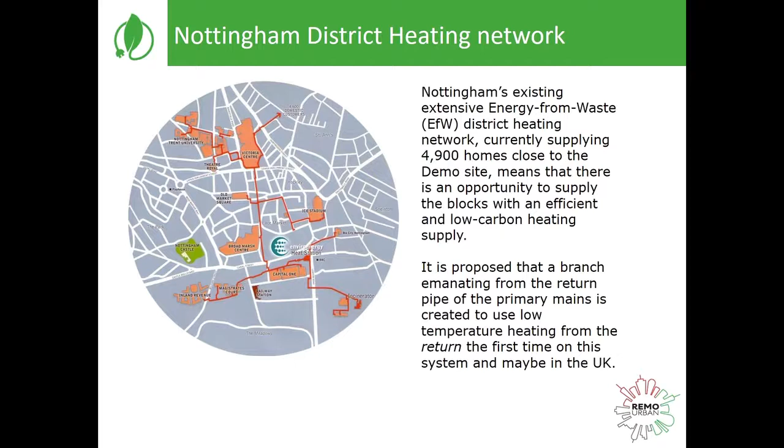What are the advantages of low temperature district heating? First of all, by reducing the temperature level, we actually provide an opportunity to incorporate sustainable heat, so the heat can be diversified by industrial excess heat, geothermal heat, etc. Also, by reducing the temperature of the supply, we are reducing heat loss by 75% due to transmission.

Since we're using lower temperature, we can also diversify in terms of pipe material, using not only metal pipes but plastic pipes. And finally, due to the reduced temperature, the danger of damage from boiling if there is some damage in the pipework can also be reduced.

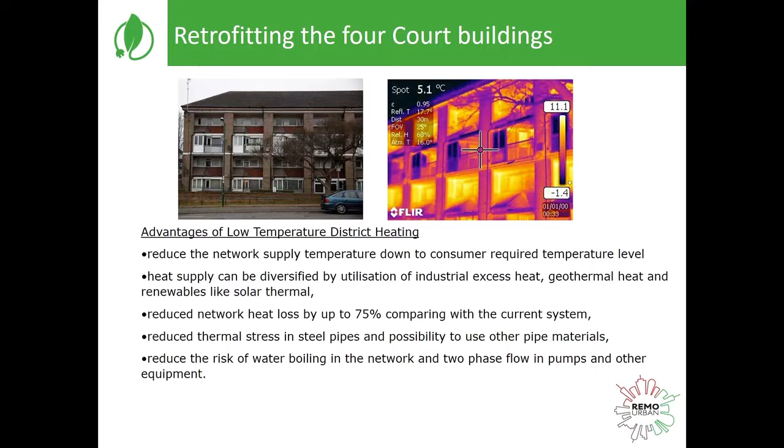The next slide illustrates how the actual retrofitting is being done. My colleague David Tetlow will talk more about the implementation, but essentially what we did was try to improve the building fabric by putting insulation on the walls, and also you can see the actual pipes on the roof of the connecting staircases.

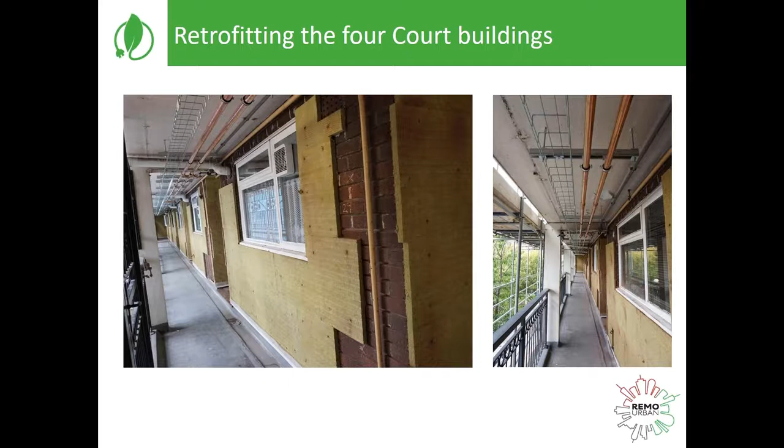Since the system has been running from March, April this year, we have used a SCADA system to collect data, and by writing programs based on Python programming software, we can collect and visualize in a much more advanced way the actual consumption and how the heat is being consumed in various places.

Based on the supply data, we are trying to develop some advanced models. The first model, developed using the Python programming language, is to do a hydraulic balance of the network. For Byron Court, which is displayed here, there are 31 flats, and for each flat we have developed a space heating system, shown at the top of the slide, to work out how best we can supply the network so that we minimize the energy used.

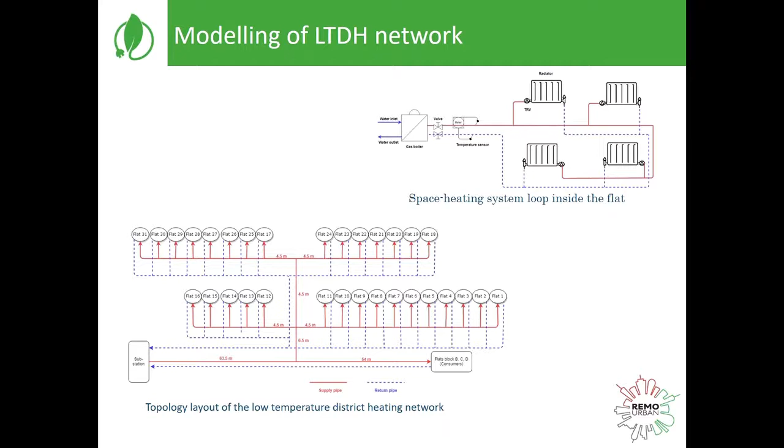In the next slide, you see we have programmed 4 different scenarios. The first and third scenario provide constant temperature supply at 60 degrees, with the first using constant flow rate while the third uses variable flow rate. Scenarios 2 and 4 supply different water temperatures with constant and variable flow rate respectively.

Using the Python model, we have worked out that scenario 3 actually provides the lowest energy consumption in kilowatt hours, and is probably the best scenario to run the network.

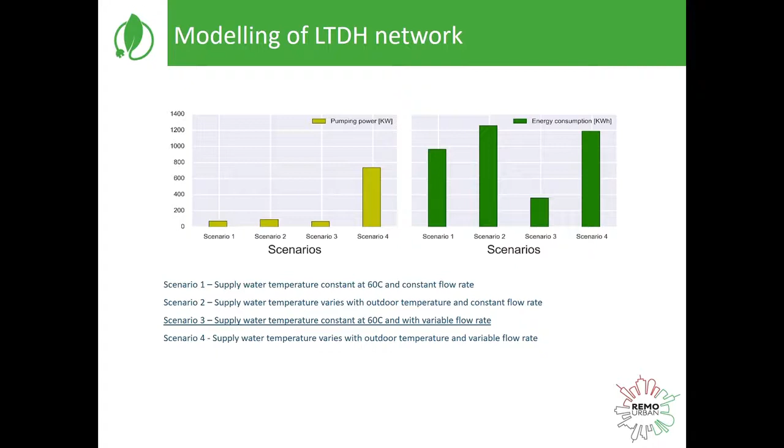Based also on the SCADA data that we collect, we're trying to develop an advanced simulation model. This model is particularly developed based on the Modelica Dymola platform, which we're aiming to use to model and simulate complex energy systems.

Using the Modelica platform, we are nearly able to develop the so-called digital twin, which can actually produce real output data, based on using Energy Plus, another program, to generate the heating needs.

In these plots, you can see that the individual courts are developed into individual subsystems, and on this subsystem we have another layer of subsystem to develop the modeling of the individual flats. The present model is still in development, but it has produced some initial results which are very encouraging, and we are planning to develop it further.

This model is based on the initial development, which can be improved later.

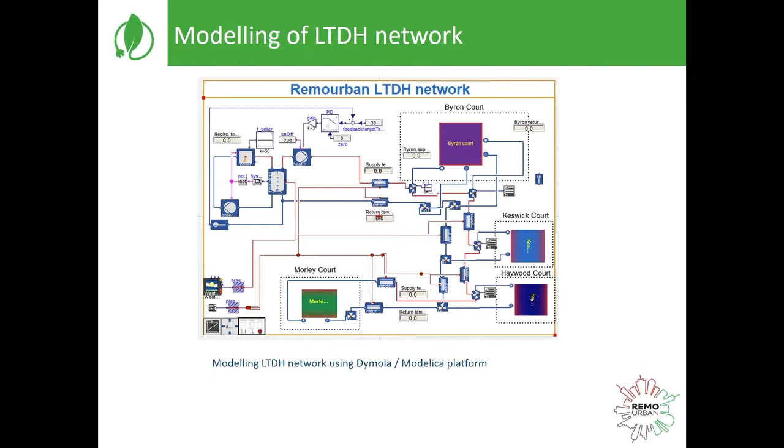Apart from this, we are also developing the so-called intelligent control system using Siemens MindSphere Internet of Things. The important element of Internet of Things is that we are creating domain knowledge, which includes historical data concerning energy used by individual consumers, weather data, etc. And we can analyze how the system operates at all levels for a complete life cycle, for example.

This system is also under development, and what we are aiming to achieve is to optimize energy use and storage, allow provision of alerts and alarms for assisted living, so the system could be implementing a real application, controlling the operation of the low temperature district heating. Also, the system permits energy consumption feedback for all the tenants, with some advice on how they can run their own heating system in the flat in the best way.

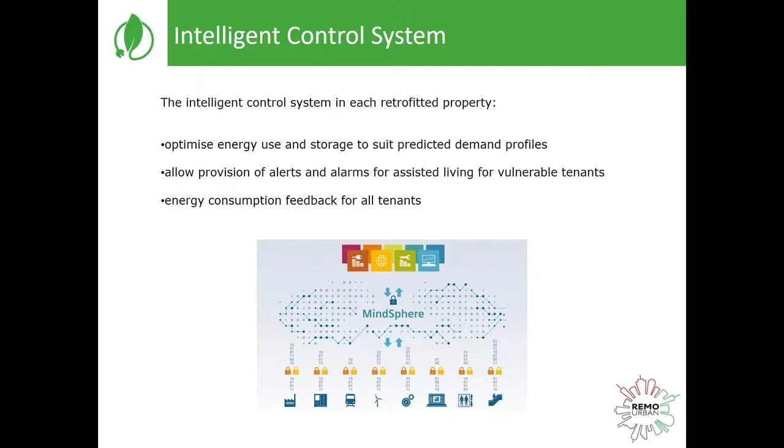In summary, an innovative low temperature district heating network is developed in Nottingham, supported by the Remourban project, part of the smart city community. Four maisonette blocks of 94 flats have been selected, where gas boilers are being replaced with heat exchangers, and they've been joined to the local district heating in the form of low temperature district heating.

Advanced modeling techniques are developed aiming to create a digital twin for the low temperature district network, and these models are developed using real data from the network. These models allow us to rapidly look into the influence of the main network parameters and introduce modifications when needed to optimize overall performance. The main aims are to reduce peak loads and reduce the return temperature of the network, making it more optimal and more efficient.

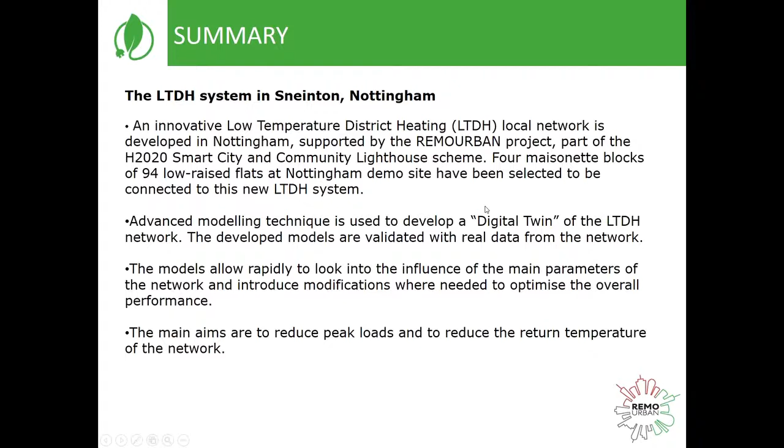Wait a minute. So, okay, are we ready? Okay, I'm going to assume that is a start. So, hello everybody, I'm obviously taking part for Arnout today. He's been taken into another meeting which occurred last minute due to another project we have on. So I get the opportunity of presenting this to you today. But me and Arnout work very closely, so a number of the parts of the presentation we're to discuss I'm very familiar with. So, this one. Okay, so it's that one there. Yeah? Okay, so...

Short introductory slide here, which outlines the reasons why we are originally pursuing the project, which essentially comes down to three things. One was to meet our climate change targets by 2050 for all of our homes within Nottingham. Now, Nottingham has a substantial portfolio of council-owned properties with a range of tenants, over 26,000 in total, and its aim is to become carbon neutral by 2028. So a significant ambition for the city itself. Essentially, we're looking to reach our 2050 targets by 2028, so this technology is an enabler in that process for us.

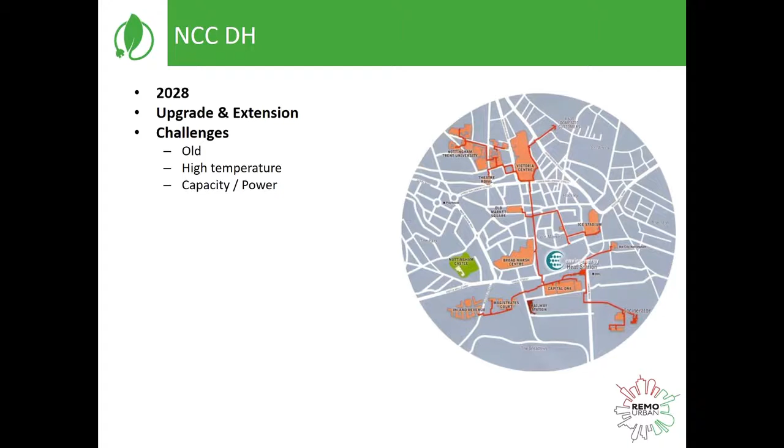So one of the potential opportunities we have as a city, which Arnout referred to in reaching our 2028 target, was the extension of our existing heat network. Now, this is nearly 50 years old, in fact more than 50 years old this year, I believe. And with that, it's high temperature. What we do is burn our waste in the city, and this provides heat to all of the properties, as Arnout mentioned previously. It has significant capacity and power, but because it feeds a certain number of house types, a large proportion of which are inefficient, improving the efficiency of those houses enabled us to extend the existing network, because more energy could be spread to more properties from that network. So that enabled us to expand where we could go with the existing network itself.

This is a typical building which we focused on in this project, a low-rise set of four buildings with 94 flats in total.

Now, these were in Sneinton, and we call these the courts. The number of units in each property varies, some have more than 30, whereas others have less than 30.

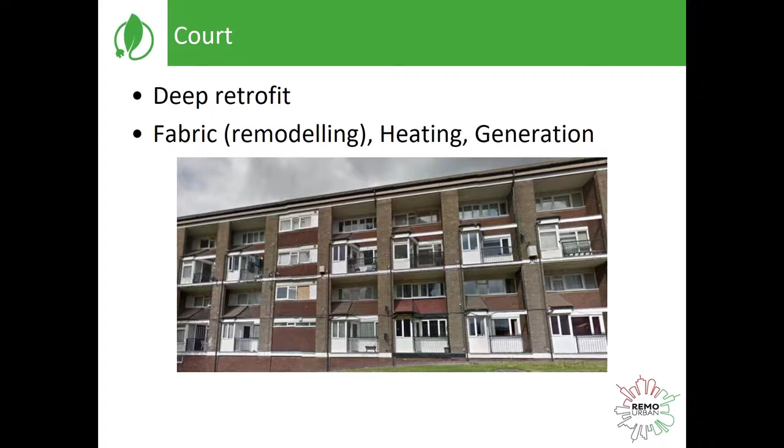The first thing we aimed to do was improve the fabric, mainly so the heat could go further, as mentioned in the previous slide. So we improved the fabric, improved the air tightness, and made them more comfortable for the tenants inside. This would reduce heating loads in general, but we were also looking to change how people utilize heat by incorporating the low temperature district heat network, which means a change in how heat is distributed in terms of temperature, but also how people utilize energy for cooking. Many existing tenants use gas cooking, so this project enabled us to look at other options like electrical cooking too. So it offered us a range of energy reduction opportunities.

This is the building today, showing what we've done to improve the fabric. Essentially we wrapped it in insulation, improved the air tightness, and made architectural changes to how the buildings are laid out. Where previously balconies were incorporated, we brought those into the living space, which significantly improved the floor space of the stock and improved the well-being of the tenants.

We incorporated photovoltaic panels on the roof, which feed a private wire network via batteries, enabling us to gain access to a lower tariff electrical supply from our energy supplier, becoming more cost effective as a business in managing our energy, and providing better services for tenants. This also enabled the expansion of the low temperature district heat network, which we've covered in this session.

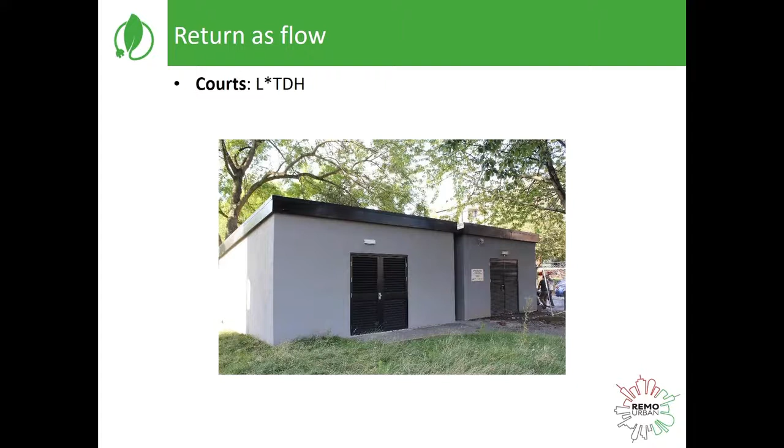So this, although a boring looking shed type building, was the extension block for the network. As mentioned previously, it houses a heat exchanger connected to the district heat network, which is high temperature, and we take it in at low temperature. Here's an example of where the flow goes in. This heat exchanger is then passed through the system, controlled by a number of state-of-the-art systems.

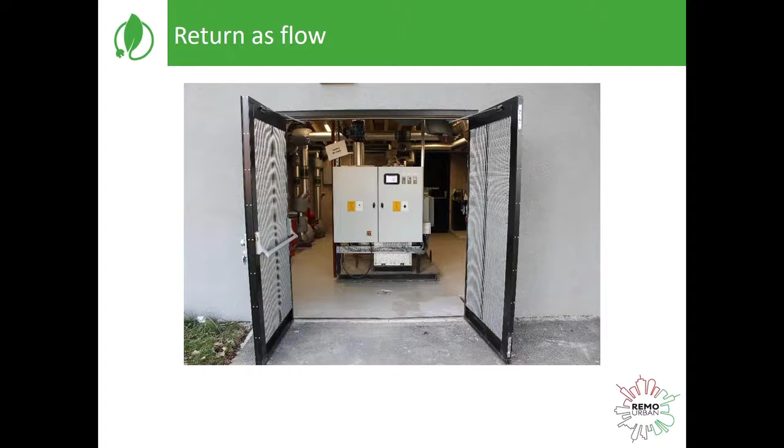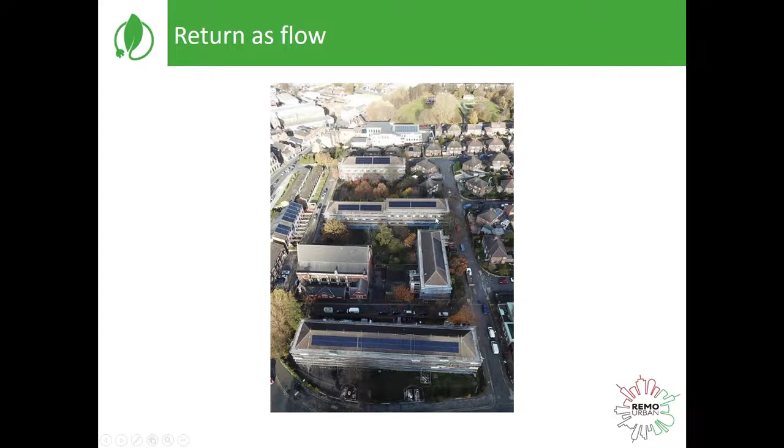Here is an aerial shot of the four buildings. As you can see, the main ones, which we call the primary buildings, are much larger than the secondary ones, but all of them were connected through a return flow, which fed all these buildings with PV panels on top, feeding into battery cells housed within the cellar areas of the main buildings via these units you can see here, all being controlled to enable efficient use of the electricity in those buildings.

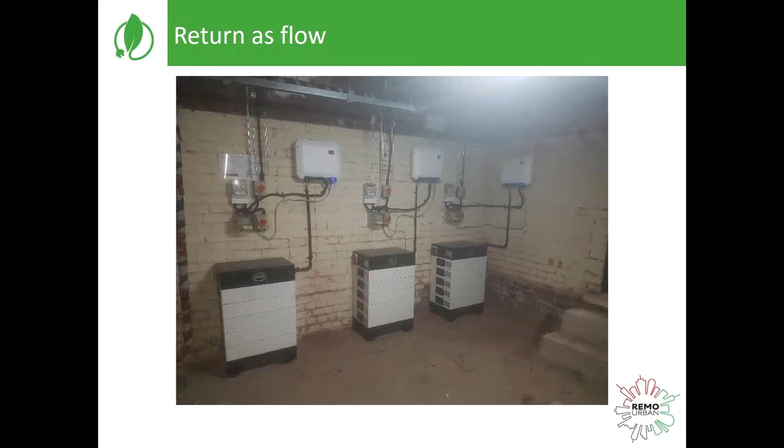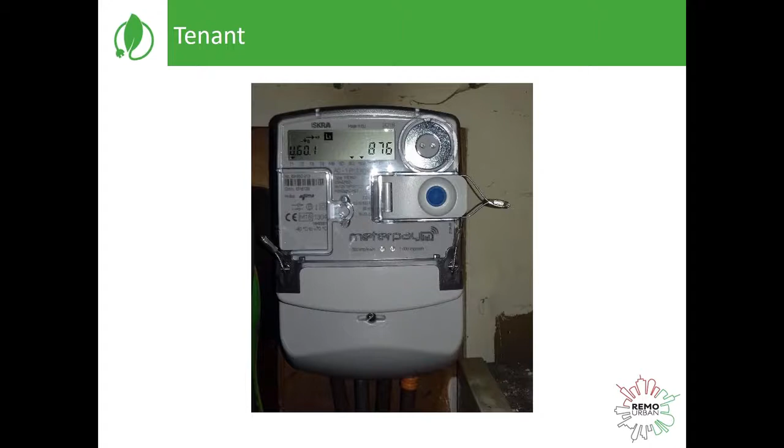Here is an example of the meters we utilize. These are wireless, so they connect to our online system and enable us to monitor the energy, which I'll cover in more detail later.

So for the tenant, what were the advantages? Well, essentially there are a number of things: bigger homes, they look better, they're more comfortable, and an overall neighbourhood improvement. The neighbourhood improvement was a key factor for us, because there's an element of stigma attached to social housing within the UK. We wanted to improve that and make them attractive so people could feel proud of living within those neighbourhoods.

We also wanted to get a lot of people out of fuel poverty, so we aimed to reduce bills down to £600. This was significant, as many tenants were paying upwards of £1,000, some £2,000 per year just to stay warm. We improved the way people could pay, incorporating web platforms and automatic payments from the bank, enabling a number of different options so it didn't significantly impact how they managed their own energy. We also gave them data access to the web platform if they chose, since more people are becoming internet savvy these days. It also provided a safety net, because throughout we provided informed intervention, updating tenants and keeping regular contact with them.

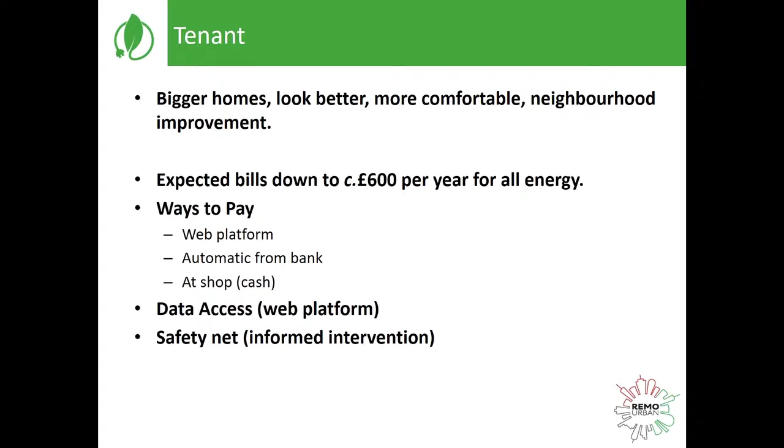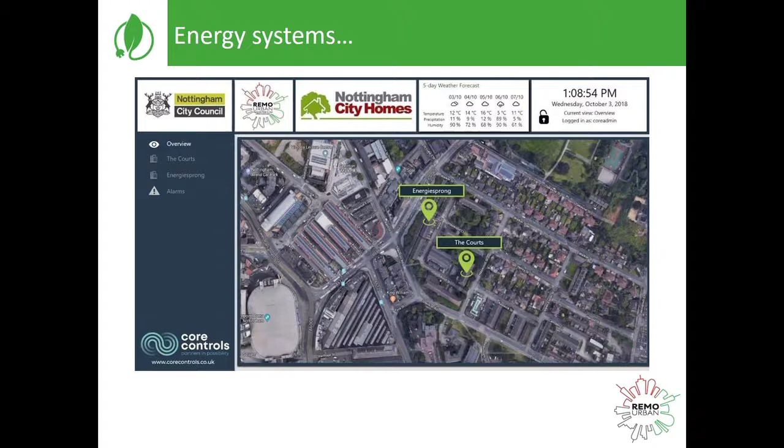This is an example of the online platform which provides information that can be adapted quite easily. We engineered this to provide us with key information so we could check online in time with data to see whether there were unusual occurrences going on, and if there were problems, we could assess where the issues were, and send out engineers if necessary to resolve issues quite immediately.

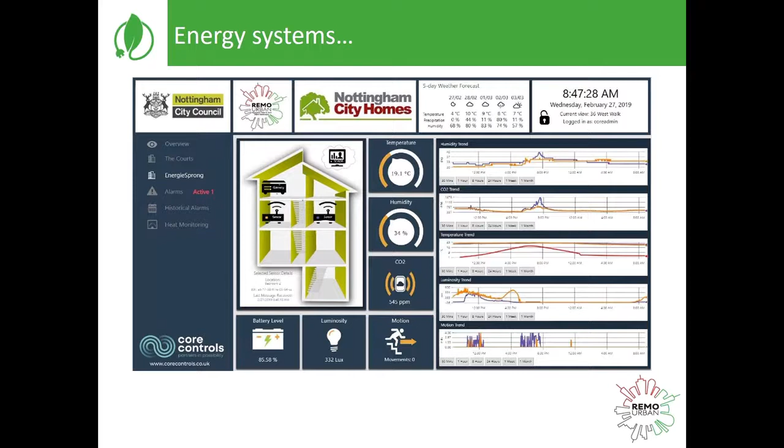This is an example of the second part of it. If we were to click in certain areas, you can see information on the exact system itself. So it's fairly adaptive and programmable to enable best management of this system by people.

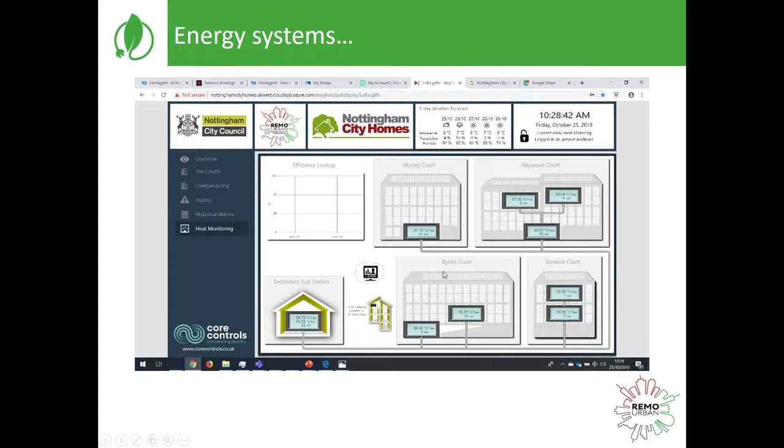As I've mentioned previously, before the refit, we had mainly gas heating and central heating on all day, and most had central heating on at night too. Most properties were fairly cold. Now the heating is only on 1.5 hours a day, and it stays warm all day long for tenants — a significant improvement in their well-being and lifestyle.

What we're finding from feedback from tenants is they're much happier. It's a significant improvement to their overall well-being throughout, particularly in the winter. One comment which really hit us was the fact that someone said they didn't have to wear a coat at home anymore, which shows the level of impact this has for people.

I think that covers all of my contributions, so I'll hand you back to Matthew.